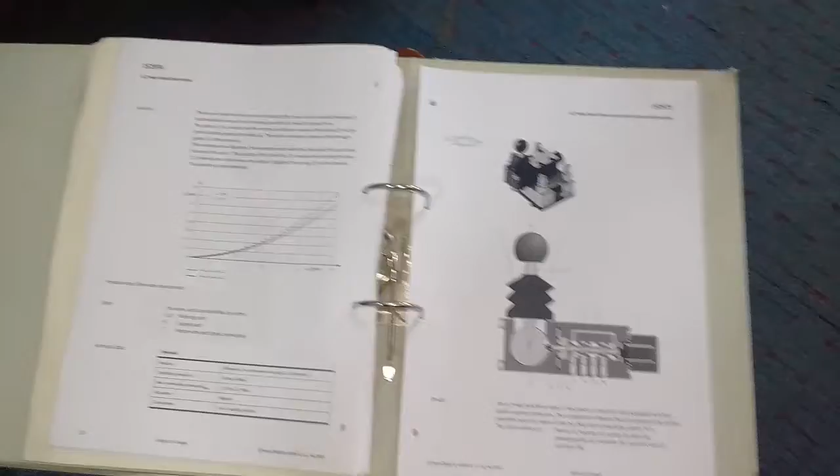Let's see here. I've managed a variety of directional valves, which are actuated either by hand lever like this one, or by electrical current like these two valves. How do they work? I've got here a catalog from Festo company, a German company. It's quite a significant and reliable set of valves and hydraulic parts.

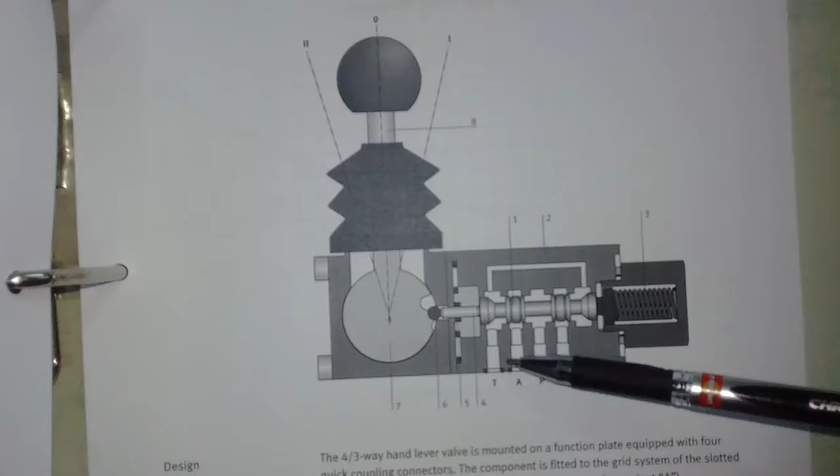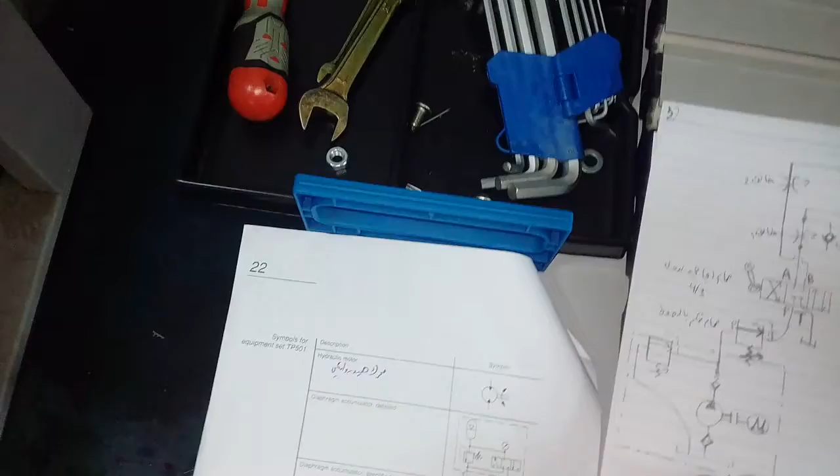Here is a view cut for a directional valve, which consists of 3 connecting positions and 4 ports. But I prefer to explain its working principle through this hand-written diagram.

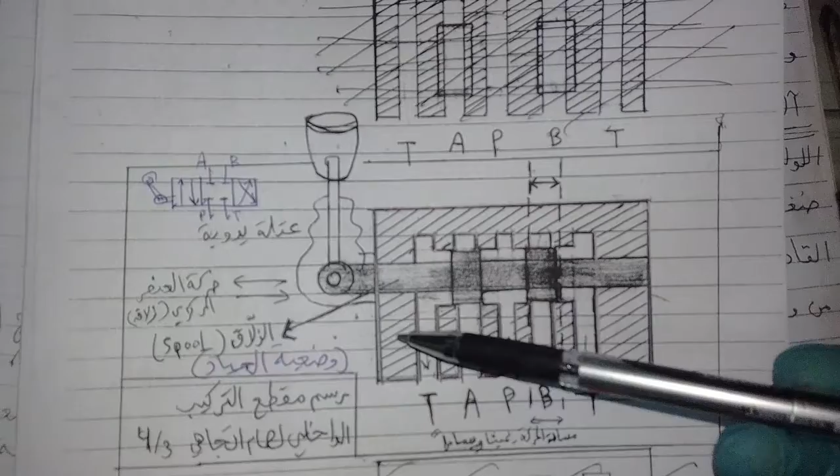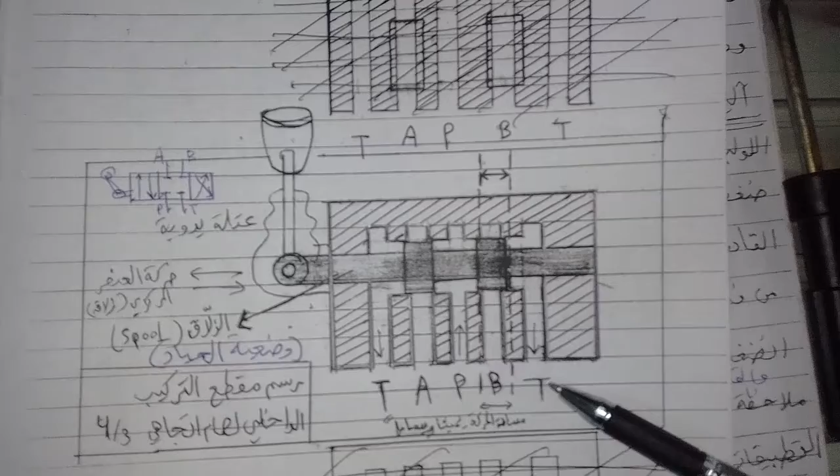This one. This is a cutting in the directional valve, which has the number 4/3. 4 means 4 ports, which are A and B and P and T. A and B refer to the actuator ports, and P is pressure, T is tank.

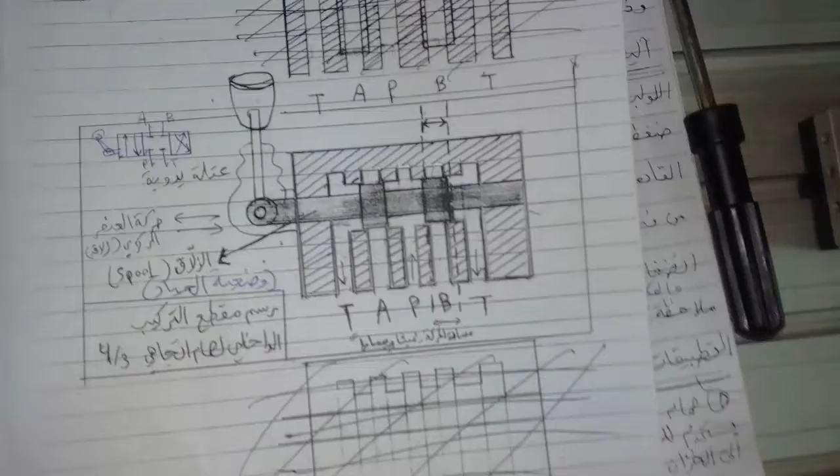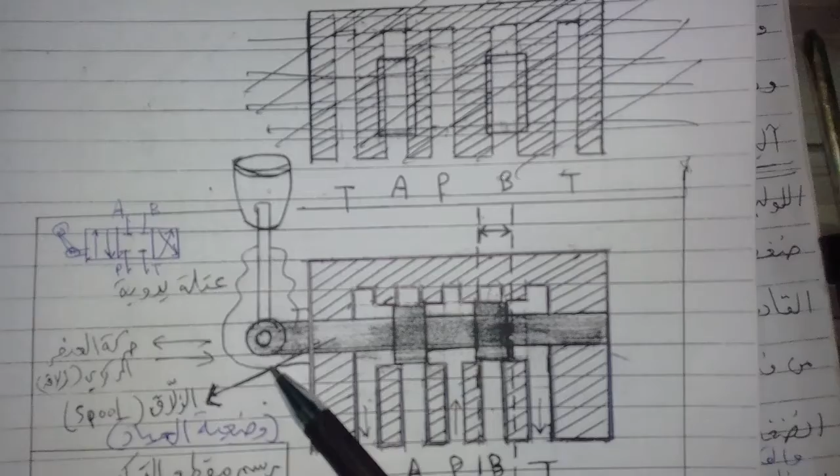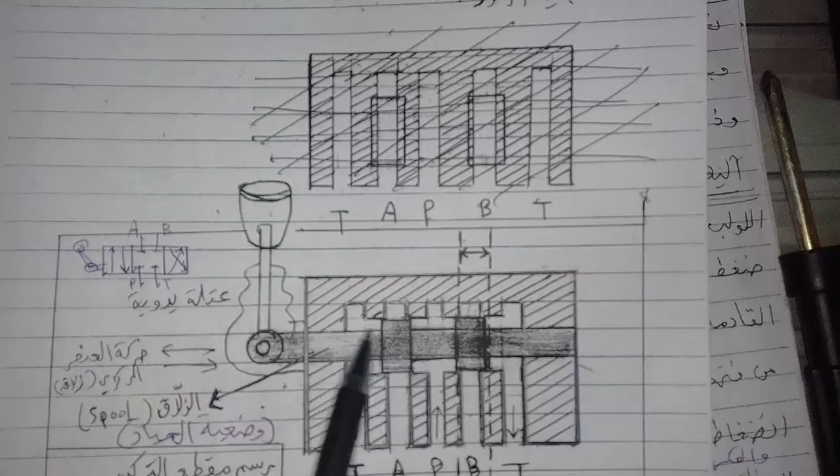Here are the ports, and here is the spool, the main spool, and this is the handle lever. It would move like this, so it would push the main spool either to the right or to the left. Through this movement, this spool would open the ports and the paths between the ports, like we will see now.

Here we see the neutral position, in which there is no flow throughout the valve.

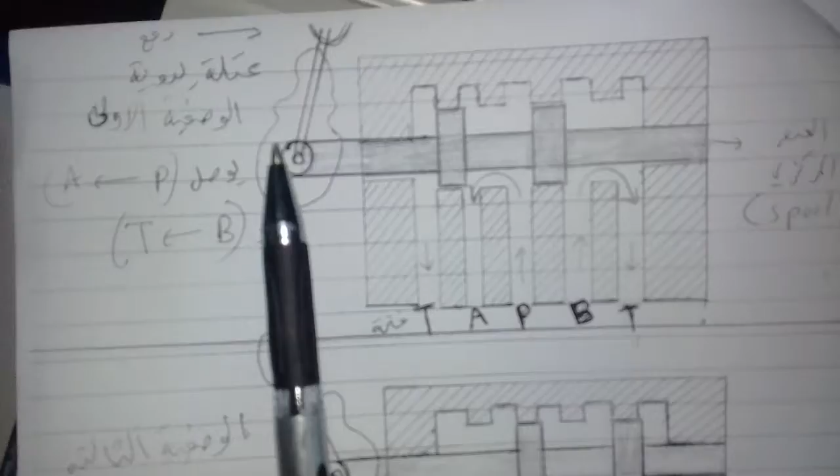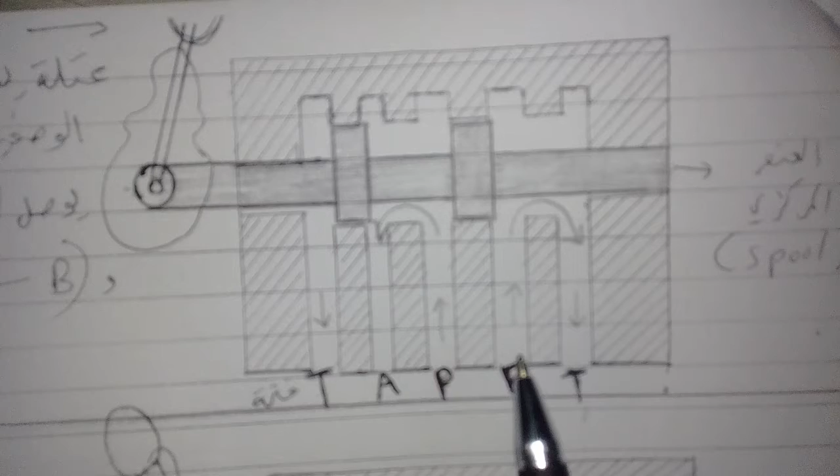Now the second position: if the operator pushes the lever like this, the main spool would be pulled to the right. Then, through its shape, it would open the path between B port and T, and P with A.

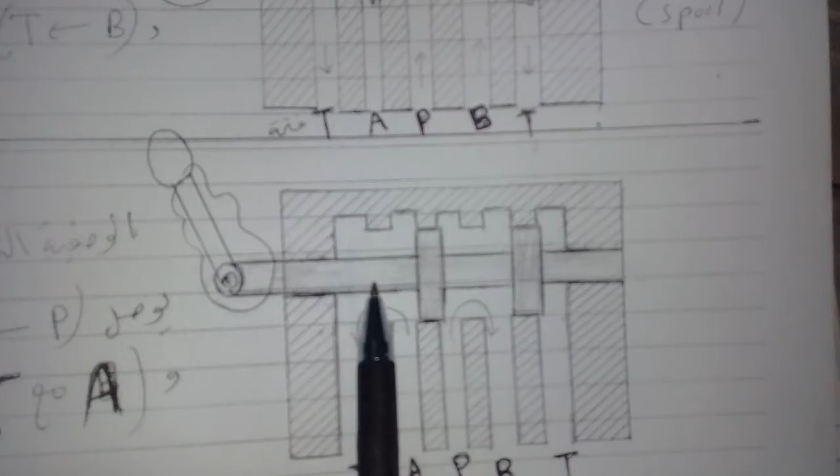The third position: if the operator pushes the lever to the right, it would push the main spool to the right. Then it would open B port with P, and A with T. So this valve acts like a traffic light in the crossroad.

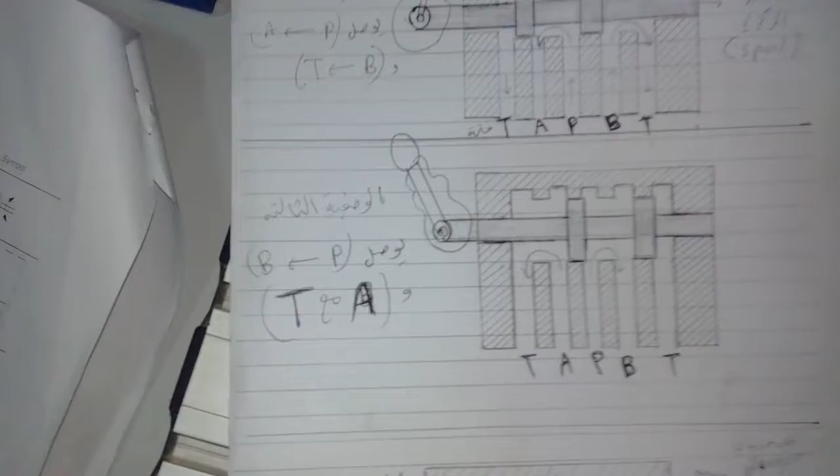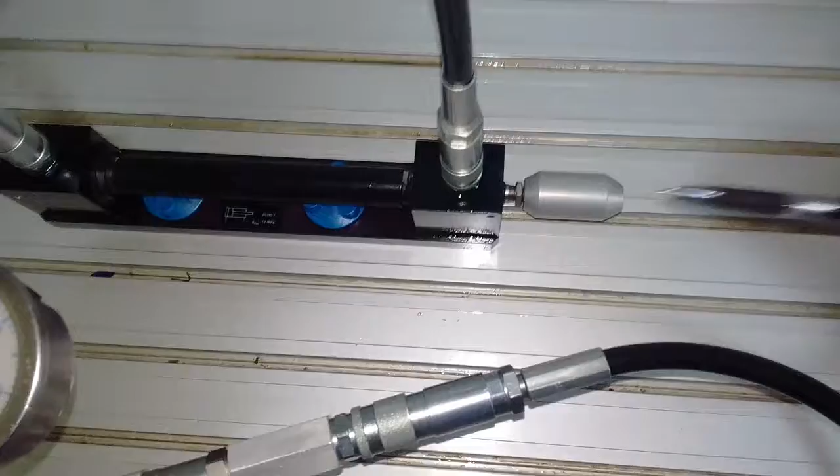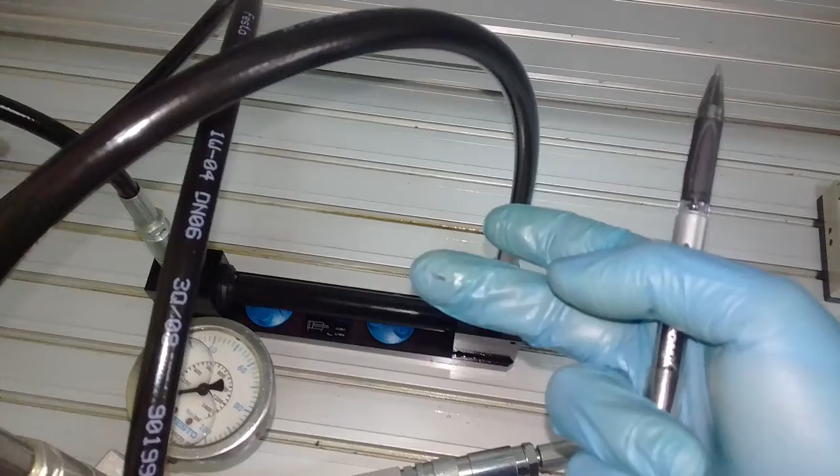This valve controls the direction of the flow for the actuators. If we want to control a double acting cylinder by 2 strokes, either advancing or retracting, we would need to change the direction of the flow through the ports A and B. So if the flow comes through this direction and gets out through this port, it would push the piston in a direction, and if it contracts in the other direction, it would push the piston the other direction. This function is achieved by this kind of valve, directional valves.

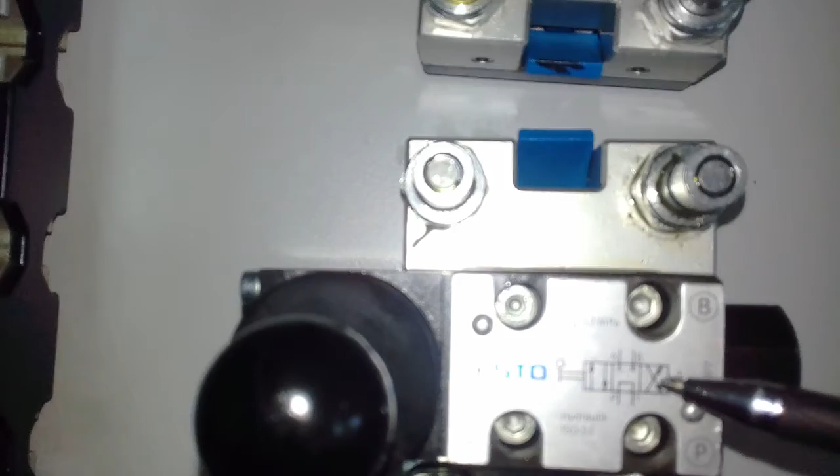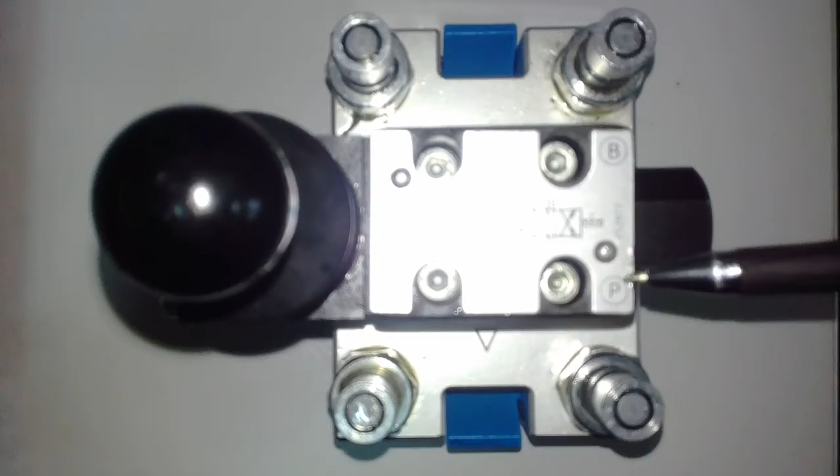Here you can see the diagram mounted or drawn on the valve. This hand lever control valve contains 3 connecting positions and 4 ports. This port is called P, and this one A, and this T, and this is B. P would be connected with the pump, and T with the tank, and A and B with the cylinder or other actuators.

And this other one, the directional valve, has the number 4/2. 4 means 4 ports, P and T, A and B, and 2 refers to the connecting positions. In this valve there is no neutral position, either advancing or retracting. And this is the same as the previous valve, but it's controlled by a solenoid, not a handle lever.

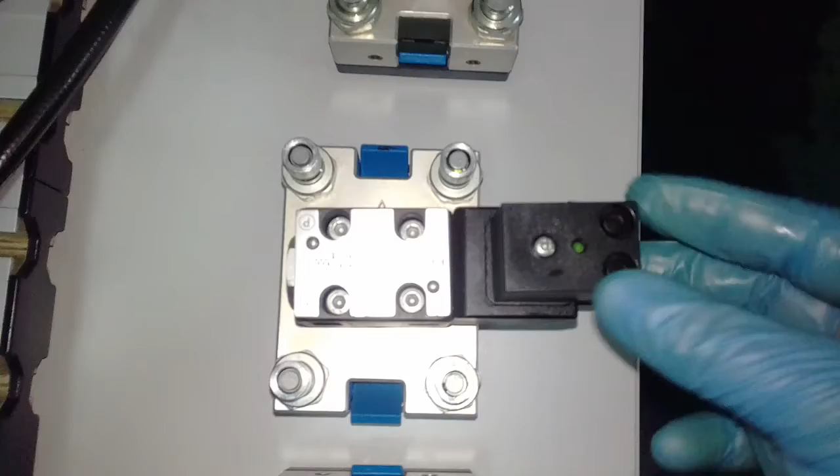And this is another one which contains 3 connecting positions, 1, 2, 3. So it needs 2 solenoids to control it electrically.

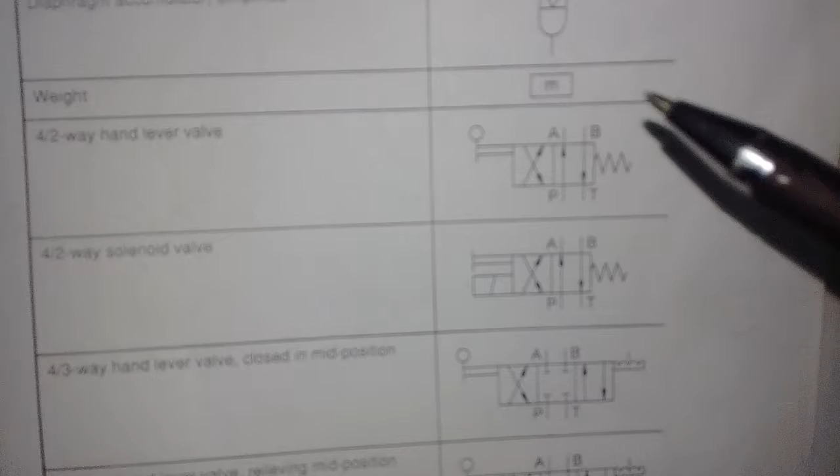Let's see the diagrams of the samples, hydraulic samples for the directional valve, from Festo company for automation and hydraulics. This is a 4/2 way hand lever valve.

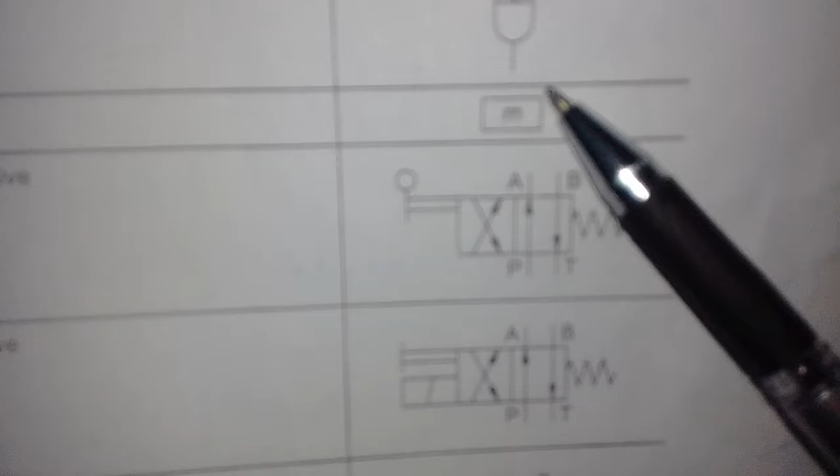For the first position, it connects P with A and B with T. For the other position, it would connect P with B and T with A.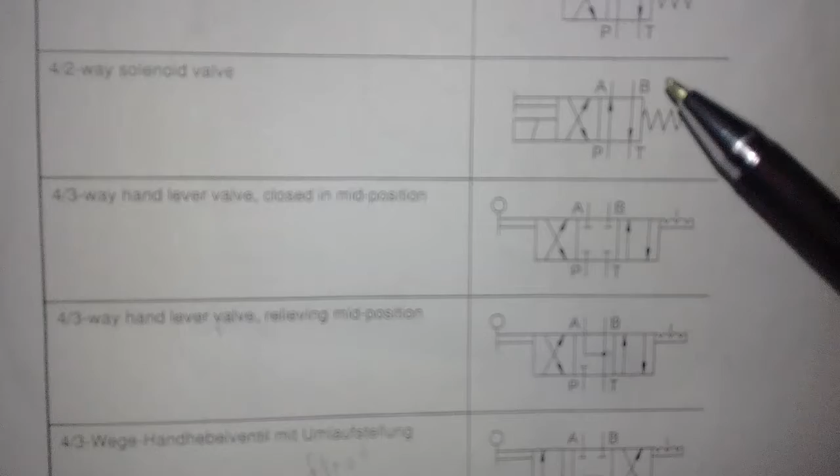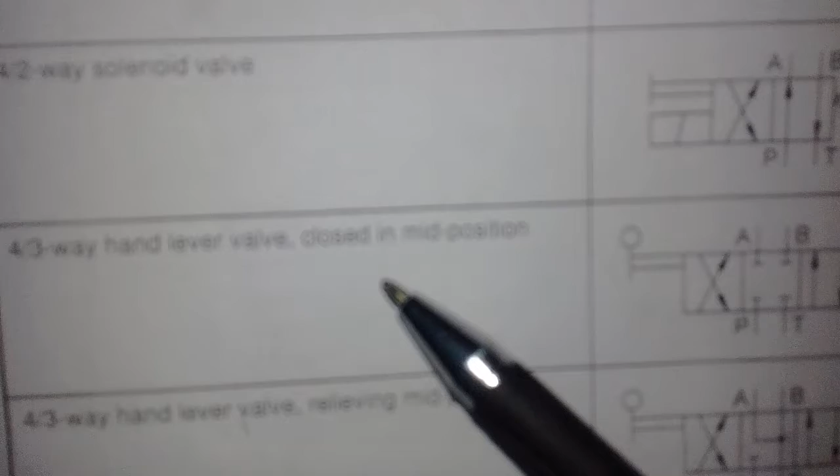This is another one, but it's controlled by electricity. And this is a 4/3 way hand lever valve, closed in the mid position.

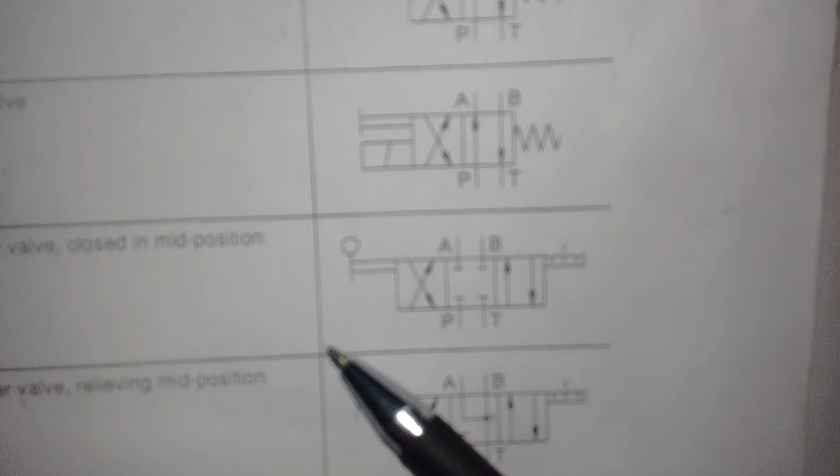So there is no flow in the mid position. For the second connection position, it connects P with A and T with B. For the third position, it would connect P with B and T with A. Here are other letters: here is A and here is B, and here is P, and here is T.

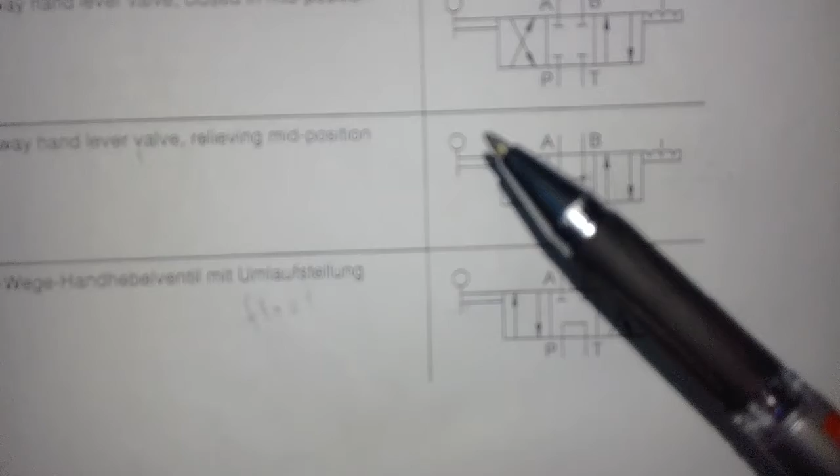This is another kind, and this one is floated in the mid position. So it's a very important valve in the hydraulic systems, controlling the direction of the flow.